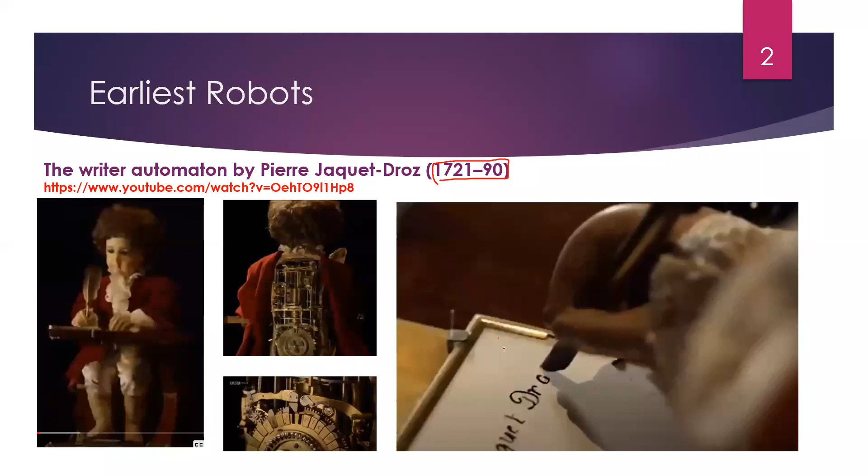This particular robot, for instance, was designed to mimic human handwriting, and it was made by a Swiss watchmaker. Swiss watchmakers are famous for making very precise and very complicated watches, and they have been famous for that for a long time.

This watchmaker made this robot, which was back then called an automaton, and it was used by some bankers for automatic signatures. So it was fully programmable. As you can see inside, the programmability comes from the gears, which were set in a certain way so that this robot could write or do certain signatures. You change the gears and an entirely different signature could be done by this.

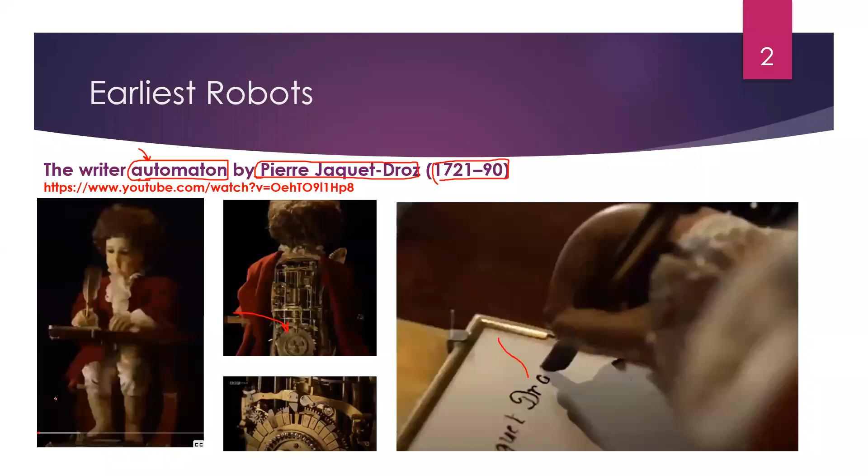So such an early system worked precisely. One other thing you could notice is that although the purpose of this robot is only to write something on paper, it was made in the form of a human. This is a full human length, human sized robot. Although they could have done the job by just building the hand, humans are also fascinated by the idea of having a full human sized robot or someone that could help them with their tasks.

This is the fascination. This is why, if you go to industry, there are many mechanical robots and they do the job very efficiently, so we probably don't always call them robots, we just call them machines. They do the work exceptionally well, but still we want our future machines to look like humans. So that is the fascination with robots. Whenever the name robot comes up, we think of a machine that looks like a human.

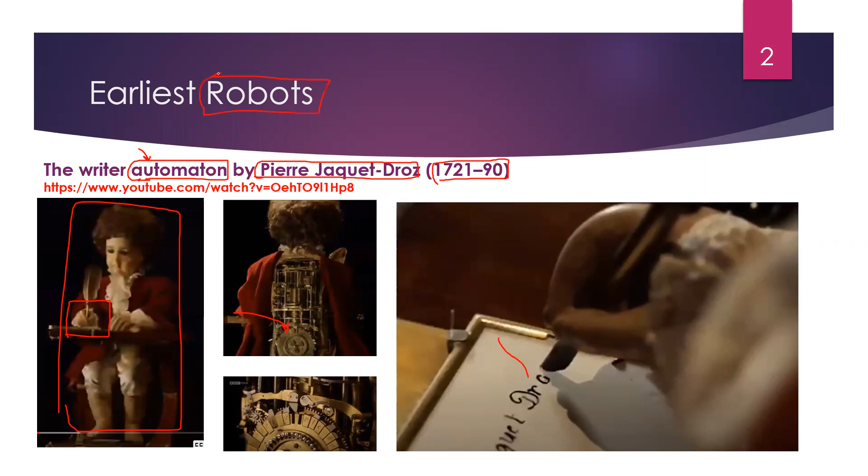And this fascination has been reflected a lot in science fiction. If you have been following the media portrayal of robots, you could notice a trend of robots mimicking humans as much as possible. For instance, back in 1977 in Star Wars, R2D2 was an intelligent robot, but it did not look like a human at all.

Gradually we see robots becoming more and more human. For instance, Terminator 2 in 1991, although it looked like a human, it was exceptionally powerful, very intelligent, and of course it looked like a human being. But we still thought that maybe something was missing, and that's why in Ex Machina, which came out in 2015...

...the robot was actually disguised as a human being. So, almost till the middle of the movie, the people watching could not guess which was actually the human and which one was the robot.

That's the fascination: making a robot almost real, so real that you could not distinguish whether it's a real person or a robot. That happens when you incorporate a lot of intelligence inside.

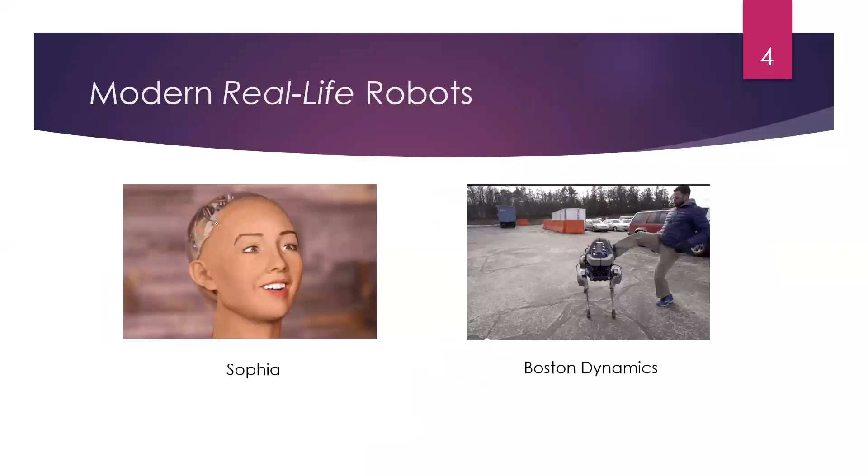Although Terminator is very powerful, and R2D2 could even fly spaceships, we did not settle with those. We want an actual human-like robot. That's why, if you have been following the news, you know the Sophia robot.

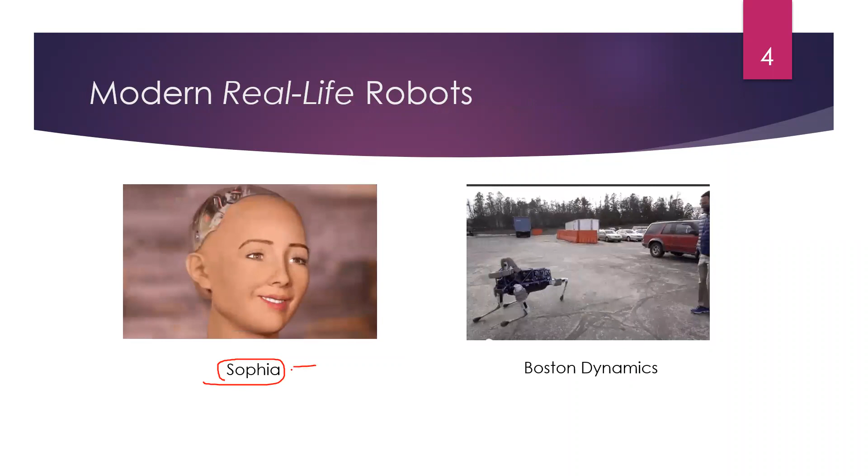The entire purpose of this robot is to hold conversations and express human-like emotions. But this is one dimension of robots. On the other hand, you may have followed the works of Boston Dynamics, which has now become world famous for their exceptionally agile and intelligent robots.

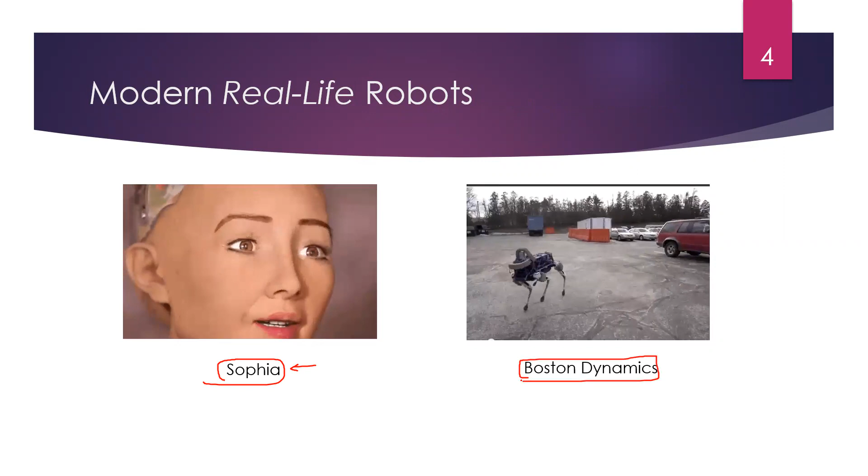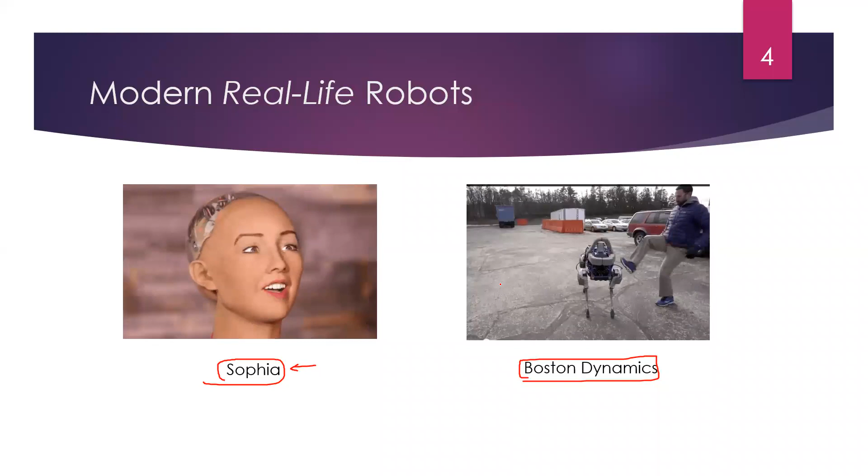These robots, although I would not call them exactly intelligent, they are very agile. They can work in various terrains, indoors, outdoors, in difficult terrains, and so on. But they are not that much intelligent, although a lot of different types of intelligence go into them. So that's the purpose of this talk today.

Not only in the media but in the actual world now, we see quite sophisticated and seemingly difficult to make robots. So what else remains for us as engineers? Can we still do something about it?

The answer is yes, because these robots are highly specialized, and you would not want either of them in your homes. In your homes, you would want something to help you with your kitchen tasks, for example. So none of these robots is suitable for that.

Our homes are messy, disorganized, and have different obstacles like carpets or stairs. These robots may not function well in our homes. So seemingly some dumb robots, if we want robots in the future to actually help us with our daily chores, for that we will probably need some very dumb robots as well. They may not look exactly like humans, but they may help us with a specific task.

That's the purpose of this talk: how to make robots that could help us with a given function. For that, we need to look into the skill set required for this.

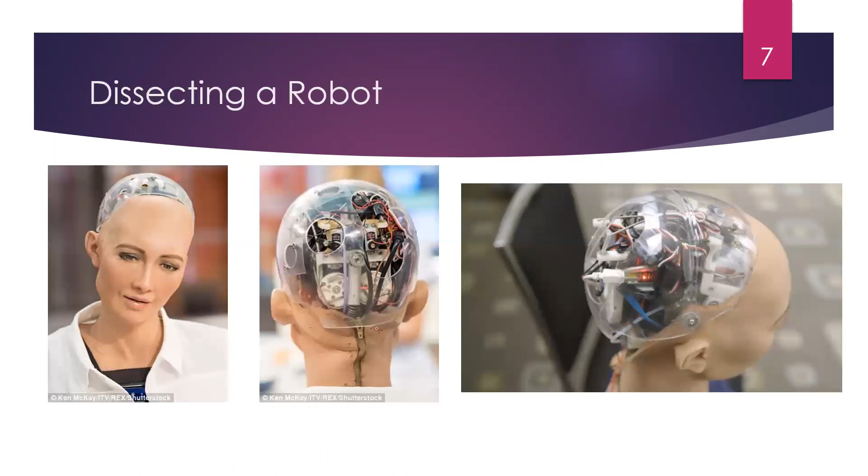So let's start dissecting the robot. As mentioned already, the most basic thing when discussing robots is, of course, the motion.

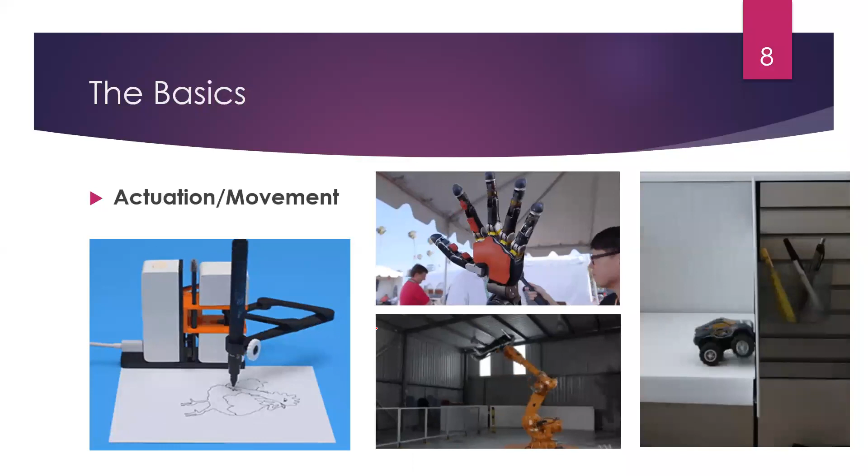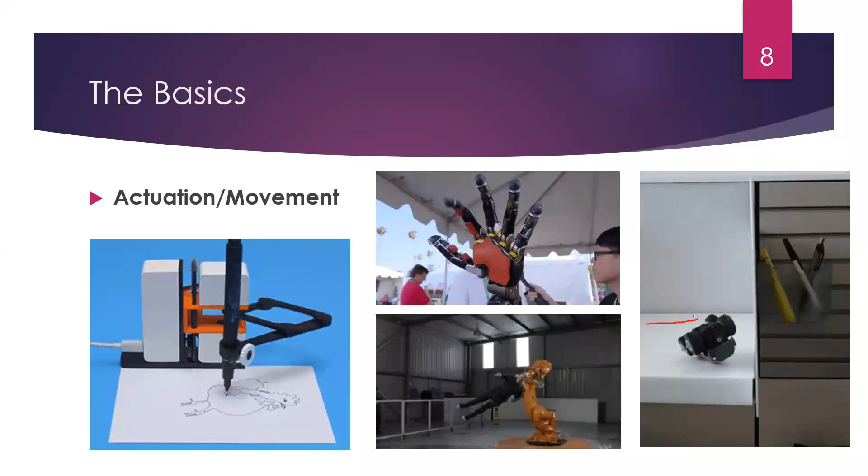When it comes to motion, there could be multiple types of motion. For example, a simple car going from A to B would only require simple rotational movement on its wheels. But if you are interested in making a robotic arm, then you would want multiple motors to act in synchronicity with each other.

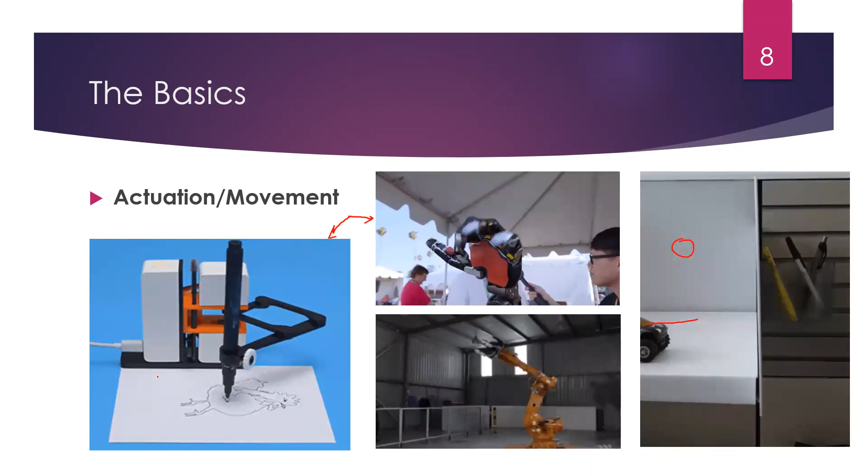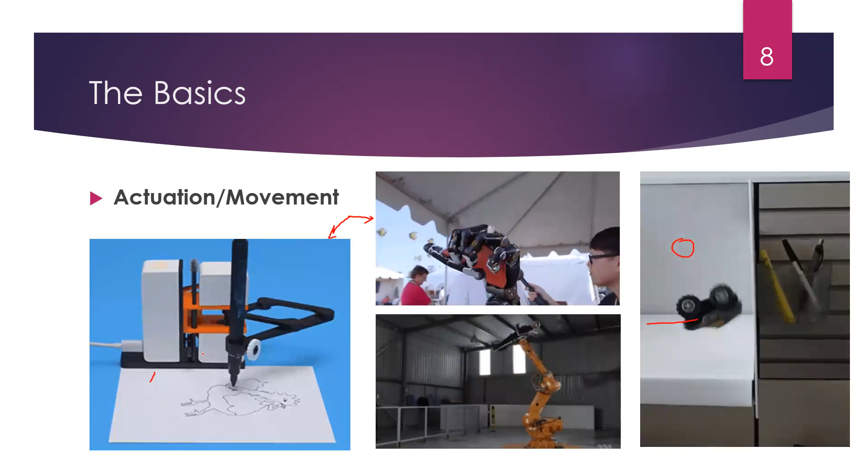So as to do a certain task. For example, in printers, you would want the inkjet or the laser jet to move to a very precise location. That is only possible if you have multiplicity of arrangement of motors, which are doing this very precisely. And the same is the case for maybe prosthetic robotic arms.

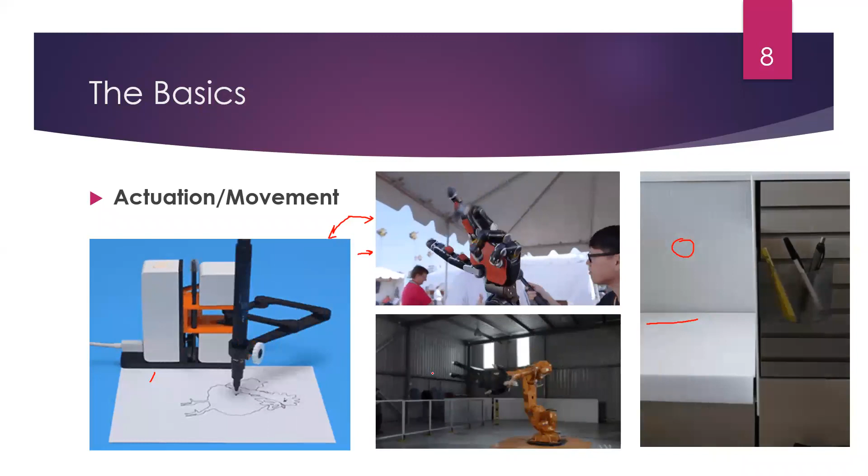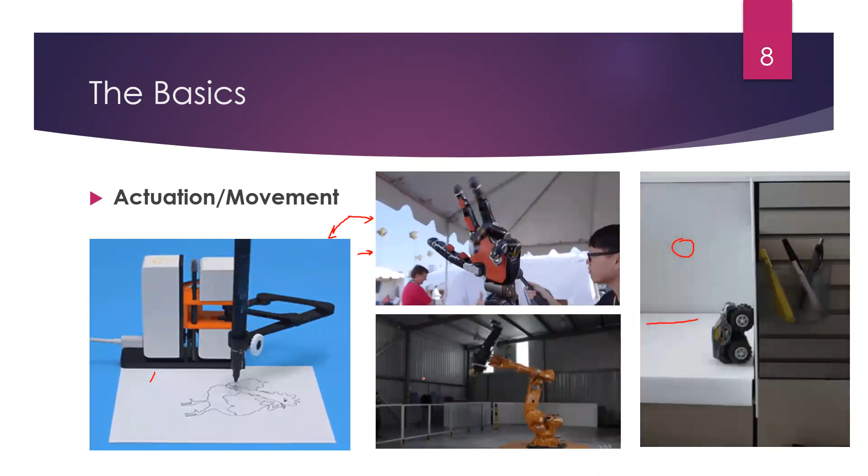And in the industry as well, your goal would be to carry heavier loads, but not just carry loads, but also do it with some precision. So you would want a particular heavy component to be moved along a certain path, going from A to B in a certain way.

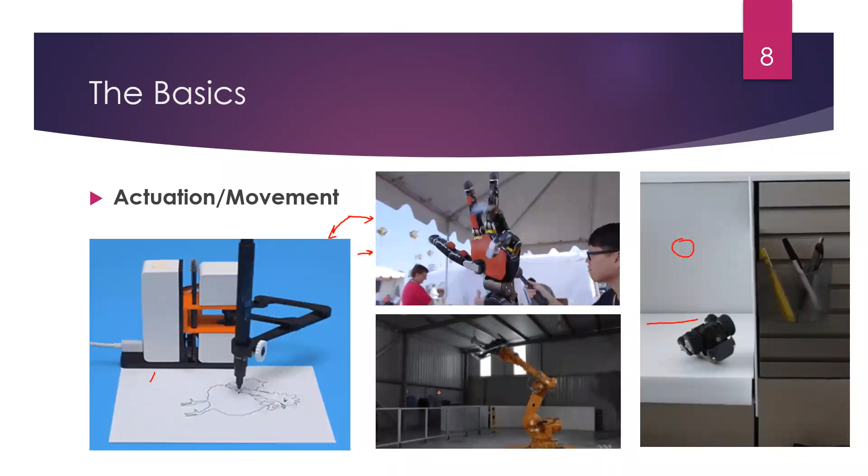So each of these motions require a different set of motors. Of course, the most basic of these is the DC motor. When you attach gears to them - as engineers, I'm guessing you already know that gears, when you attach them to a basic motor, give the motor additional torque.

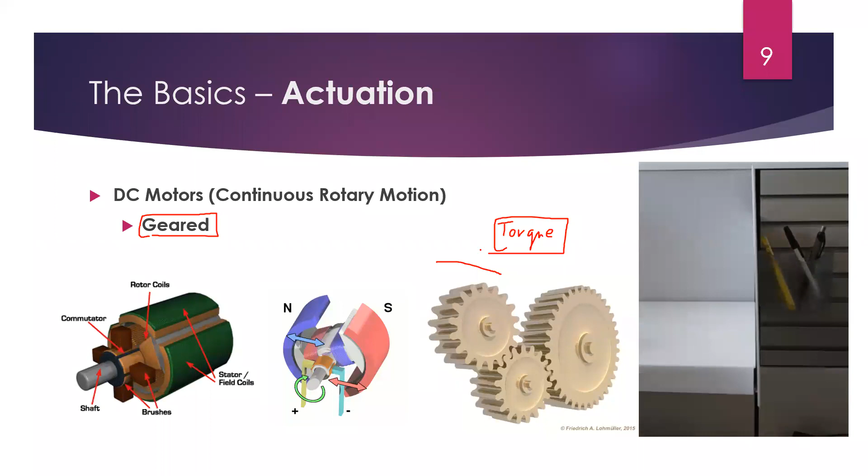So in most cases, torque is an important thing. The most basic amendment you could do to a simple motor is, of course, add some gears so that you have additional torque. And then you would also want to do some very basic controls - for example, changing the speed of the motor, and also changing the direction of the motor.

So all of these things have sort of matured right now. Maybe some 30 years ago, in the 80s or 90s, doing a project on robotics would have been a very expensive hobby, requiring you to collect things imported from some very specialized location. But these days, thanks to the advancement in power electronics, and also the way we now build motors, this has improved a lot in the last 20 or 30 years.

So now we have plenty of ready-made devices available that help you build your robots real quick. And speed control or direction control are now considered the very, very basic things.

So just for your reference, if someone is interested in building a simple speed and direction control circuit for a simple motor, this is a very commonly used power electronics circuit that electrical engineers very commonly use in their projects. So if someone is looking for building a very quick and dirty robotics project where you want to change the speed and direction, this is what you should be looking for.

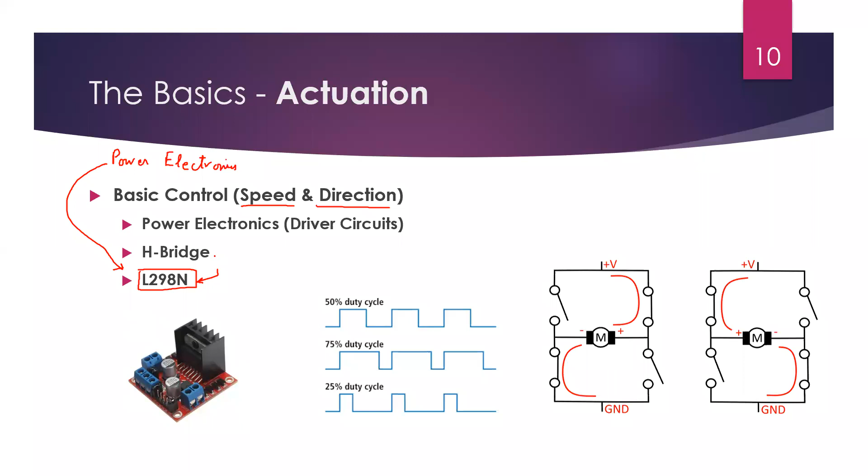Then once you have done the basic movement, you would want to do it precisely. Maybe you would want to move the motor by a certain degree or by a certain distance. So for that, we would require what we call the position encoder.

So inside the motors, after we have added the gears to add torque to it, we would now want to measure the position as well. So for that, we add what we call the position encoders.

Again, thanks to the advancement in industrial technology, motors with position encoders are very freely and cheaply available, and you could control not only their speed and direction, but also read at what distance exactly they have traveled, how much angle in either direction, clockwise or anti-clockwise, they have moved or you would want them to move.

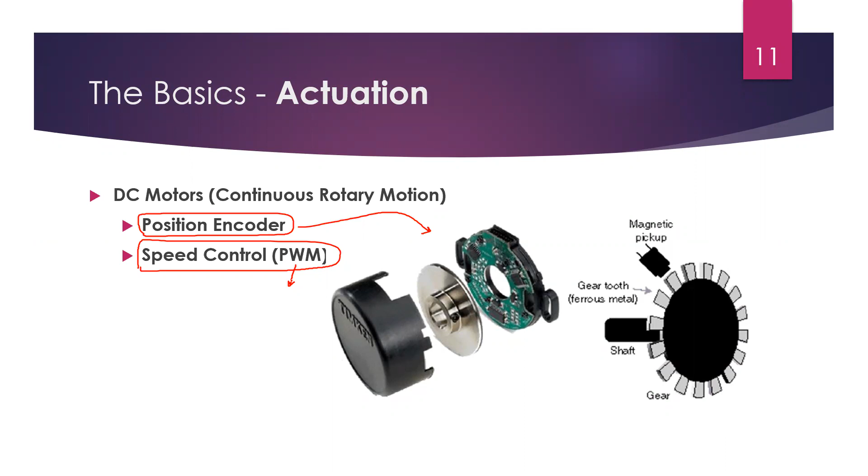And then you could control their speed through a very famous, very popular method, which is PWM, pulse width modulation. I truly wish we could go into further details, but since the topic right now is robotics in general and not motor control or power electronics, I will not go into further details, but of course you are welcome to search more into this area.

Now, thankfully, using the same methodology, which is pulse width modulation, we could also control a second type of motor - the type of motor which goes back and forth. For example, if you notice the behavior of this motor, it can move by a certain angle.

It doesn't continuously rotate in either direction, clockwise or anti-clockwise, but it moves by a certain angle, and the angle is controlled through a similar kind of signal, which is pulse width modulation. So we call these motors servo motors.

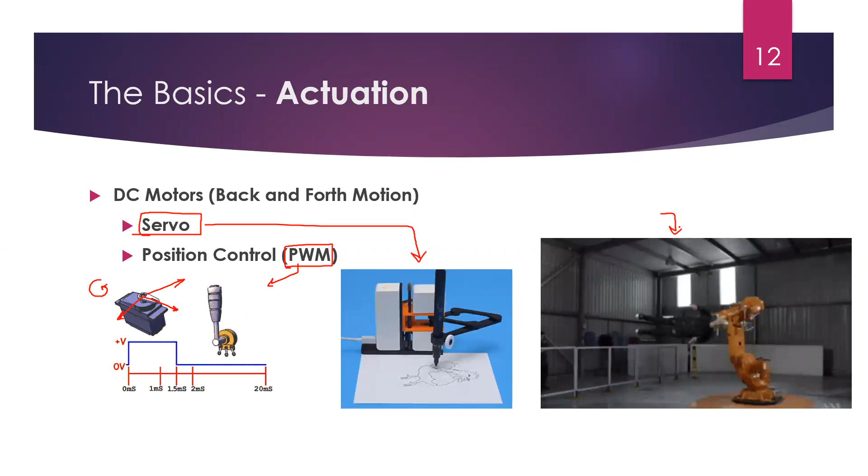This is the kind of motor you would hook up inside a printer, for example, for precise movements, and also in industrial robotic arms. If you want to build a robotic arm which can have certain types of movement, but not exactly rotary movements, then this is the type of motor you should be looking at. Your actual arm, your knees and elbows, they all move something like this. We cannot rotate our knees or elbows, but we could do something like this. So using this you could mimic a robotic arm very easily.

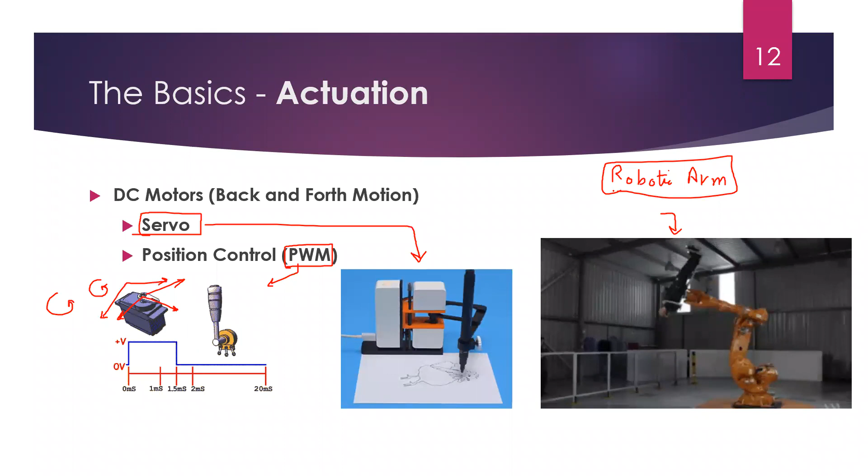And they can be quite strong. They can have a lot of torque as well. You could very easily get from the market some very small servo motors, as well as very large ones which could carry a lot of weight.

Finally, the last type of motor is where you want extremely precise motion, for example in a printer. Although the servo motor we just discussed could also move precisely, its main purpose is carrying heavy weight, not precision. So that is precise, but not this much precise. These types of motors, which are inside 3D printers as well as normal printers, are very, very precise. They can move in the order of millimeters.

They could move by one millimeter in either direction very easily. But of course the downside is that they cannot carry a lot of weight. They cannot provide you a lot of torque. And their control is also a bit more complicated.

But as I mentioned previously, the control and power electronics for these motors have now matured to the point where you could just buy most of the control very cheaply, and they are very commonly available. Even some 20 years ago, getting your hands on a stepper motor would have been difficult. Getting spare parts for your printers would not have been an easy task. But nowadays these things are considered petty electronics.

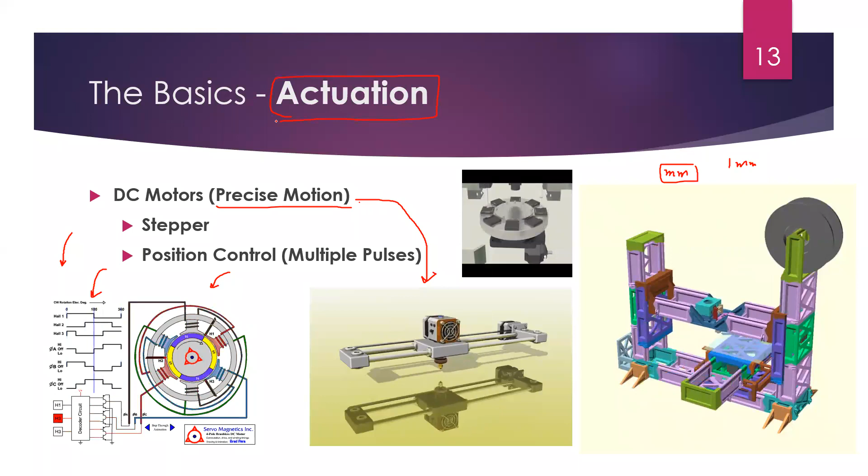So these are the three basic types of motion we have just discussed. PWM servos for precise motion, but with also some torque. Stepper motors for very, very precise motions, but not a lot of torque. And gear motors where you can have a lot of torque as well as a lot of speed, and they can also be moved precisely, but not as precisely as steppers. So depending on your application, you would want to choose an appropriate motor.

Next comes the topic of sensors, because once you are moving your robots, you would now want to also do something more intelligent. So when we talk about intelligence, automatically sensors come in.

The most basic of the sensors that you probably might have already used, or may have read about, is the distance sensor. These are very commonly available - the sonars or ultrasonic sensors. They work on the basis of echolocation, and they work very nicely for most indoor environments. They can help you judge the distance from various obstacles, but of course they have limitations.

They do not work well for obstacles that are at an angle, and for certain soft materials like clothes, they do not work really well, but otherwise they are pretty good at judging the distance between different obstacles. Imagine putting this on the front of the robot, and you get a fairly good idea of where the obstacles are. By the way, these are the same sensors found on the bumpers of most cars.

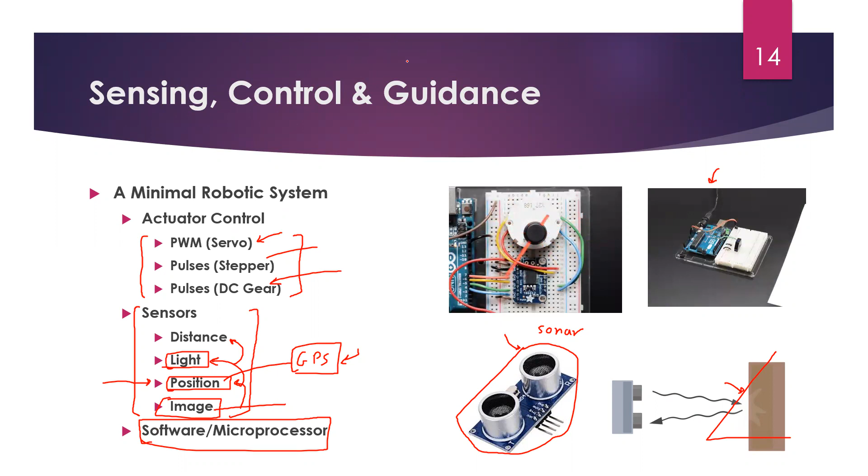So we have seen that motion is probably a done deal. You could control a motor precisely, tell it to go to some place by some angle and some distance, or attain a certain speed, but that is the actuator only. If you now want a meaningful application, you would want sophisticated control. So what's control? Control is on top of your basic actuation.

Imagine a car, or a robot, that has to follow a line. I'm guessing that as engineers, you must have seen a line following robot at least once in your life. So what is this line following robot doing? Inside this robot car, there are of course two motors at least, and those two electric motors are being driven, but what is making it follow the line? That is the most basic control.

At the very basic level, it would be an on-off control that works like this: you have sensors which detect the line. If you are going towards the left of the line, you turn right. If you're going towards the right, you turn left. So it's on-off, or right-left control. That is the most basic control.

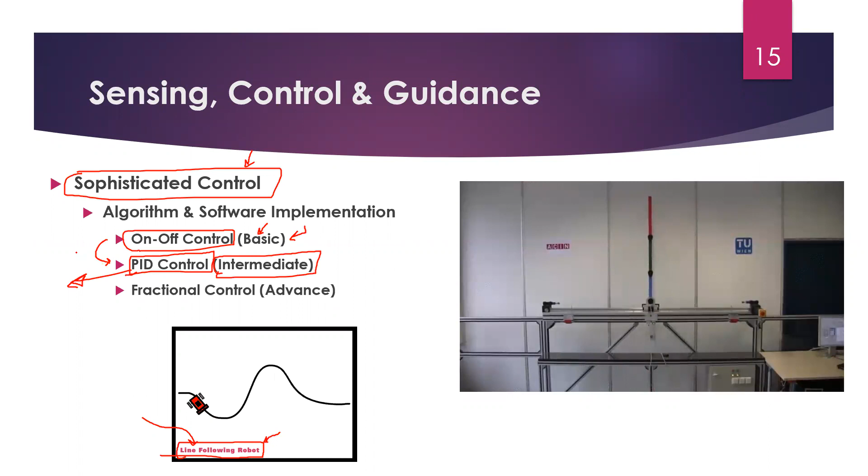PID control is a huge improvement over on-off control, and that gives any motor control the precise or smooth control. We call this an intermediate level control, not the basic, but somewhat intermediate, and also not too advanced. But in most robotics projects, you will find that PID control is sufficient to give you a very smooth kind of control.

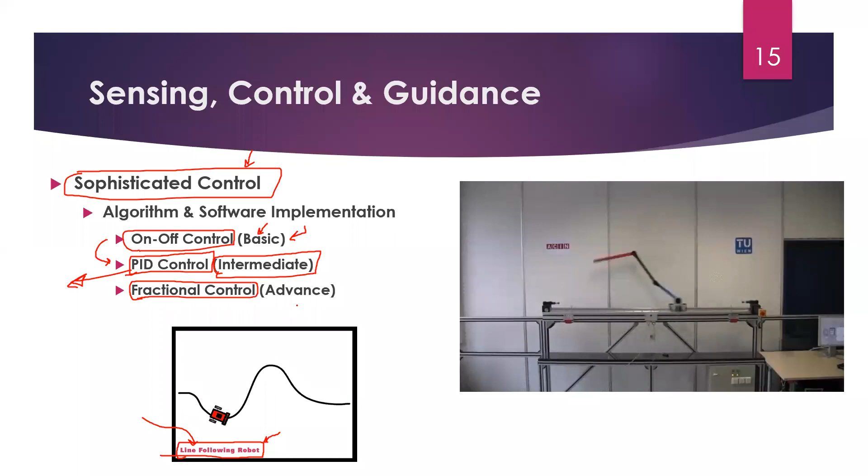And then we will have more advanced control. One example of a very advanced control is fractional control. Those fractional controls are used in very sophisticated operations. So if you are looking at a robotics project, then maybe this PID control is sufficient.

So over here on the right, you are seeing an application, a toy application you could say. This is called an inverted pendulum. Here you can see that the goal is to hold these three sticks upside down. The actuator can only move sideways - there is no other actuation. But there are sensors that have been mounted here.

What type of sensors? They are called tilt sensors. They measure how much the bars are tilted - the kind of sensors that you have in your smartphone. Your smartphone knows if you are holding it horizontally or vertically, and then it accordingly shifts your screen, rotates your screen. These are called tilt sensors.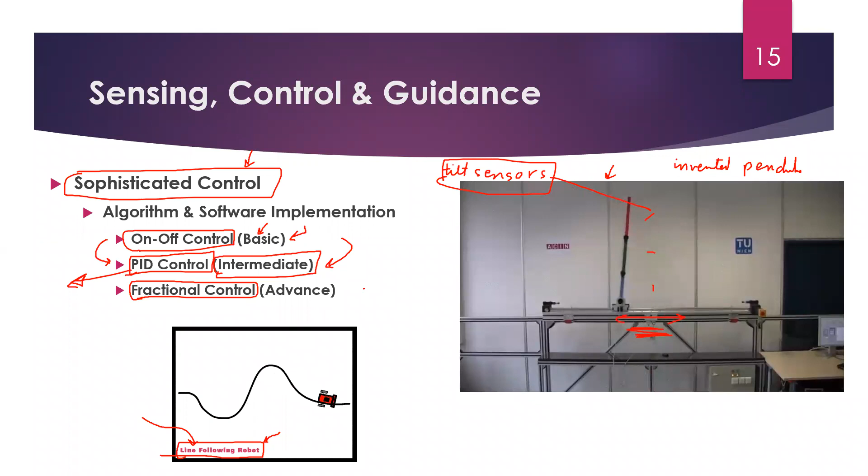So the same type of sensors are probably installed in these three bars, and based on those, this motor, or the actuator, is just doing this translatory motion and balances that. And that is probably a much more advanced control. But you could do a similar thing using PID control as well.

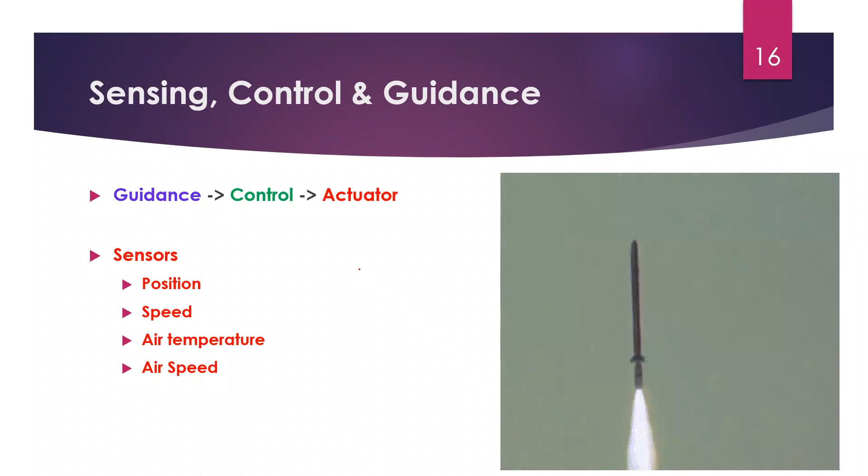So we have seen that the most basic of things is the actuator, the motor. You are giving it some control signals so that it moves forward, backward, some speed control, and so on. And on top of that, you need to have a control. The purpose of this control is, for example, to have...

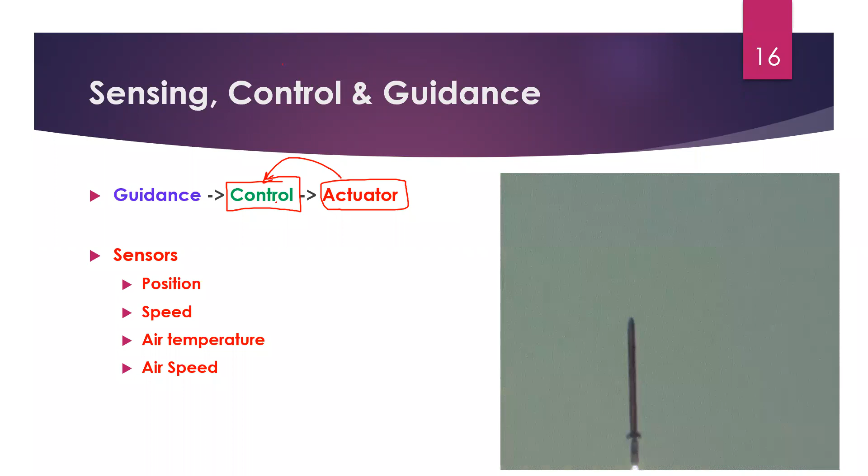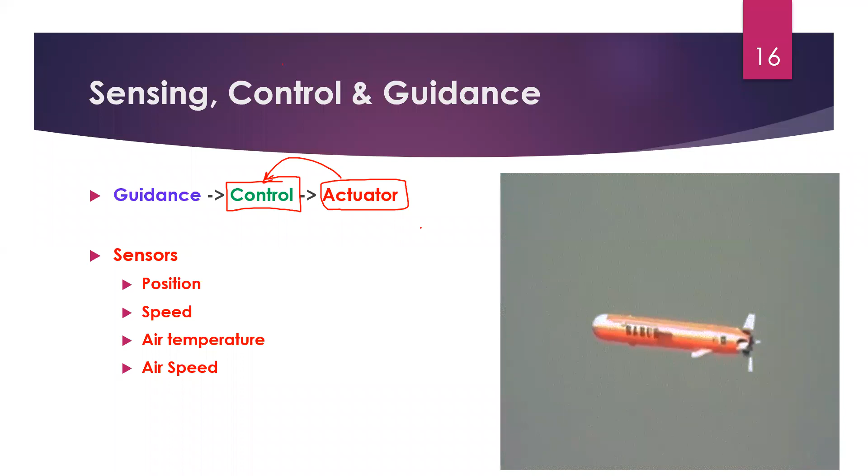Okay, so on top of the basic actuation, we have control. And the purpose of this control, like we saw previously, could be as simple as follow something, follow a line, follow a path, maintain speed, or in the case of airborne vehicles, maintain some angle of flight, and so on. This is what we call the basic control.

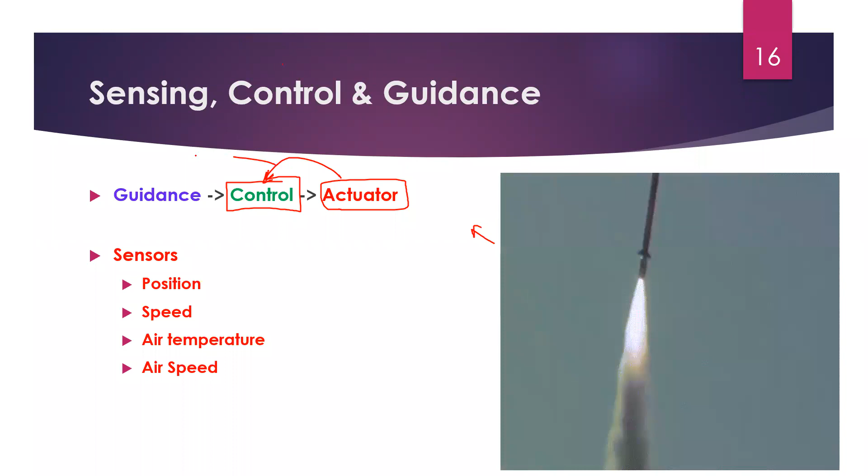And then on top of this, we have the guidance. So guidance is going from A to B. This is the purpose of higher order robots, for example, a missile. There we could make use of certain more advanced sensors as well.

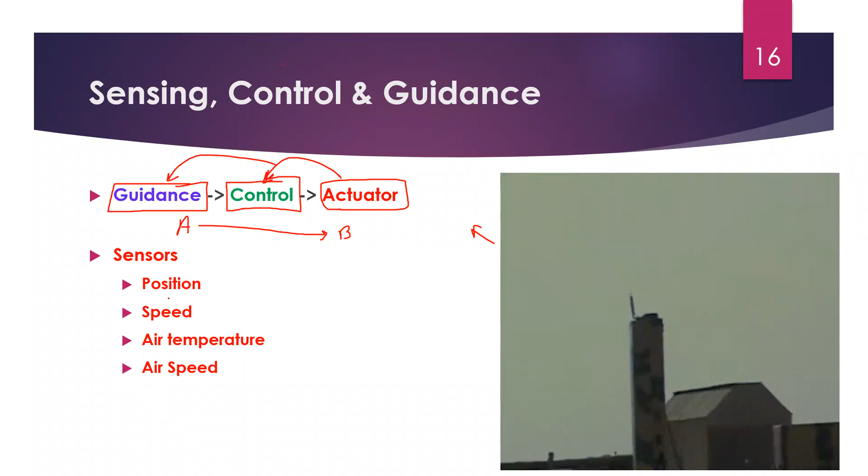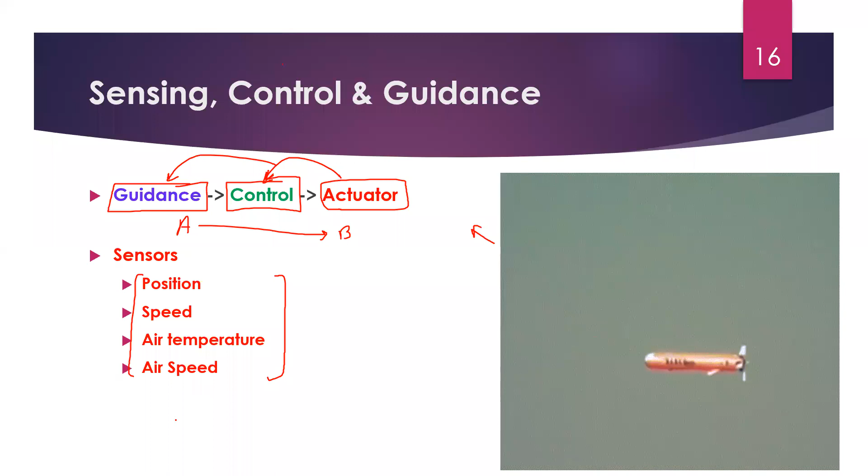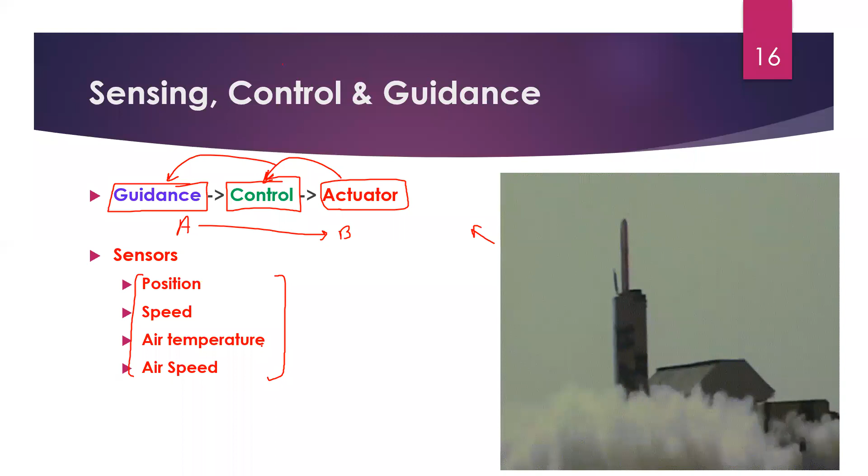Simple position and speed sensors may not do really well, so we would want some more advanced sensors there, plus some other sensors like air temperature or air speed. They might come up because maybe the missile has to move up or down based on air temperature and speed, so as to maintain some flight characteristics. That is the purpose of guidance now - that is a higher level control.

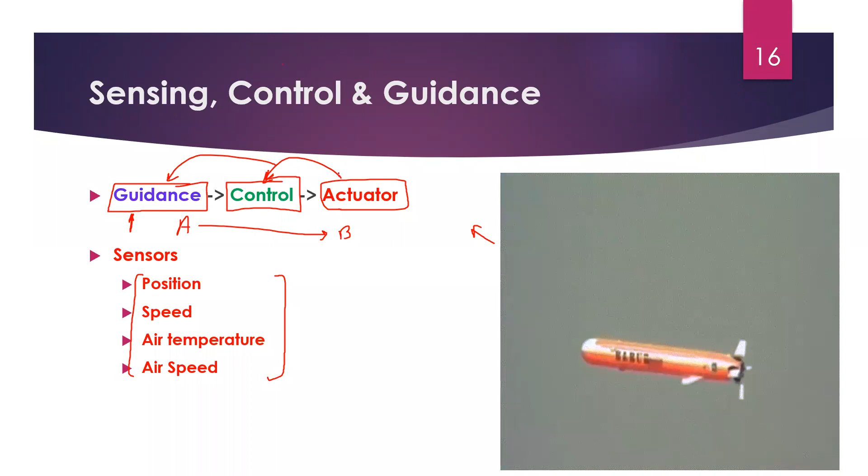And now you can see that very quickly we are moving upwards, and the robot or system is becoming more and more sophisticated. And once we add some autonomy to it, that means doing something - we just give it a goal and then it does it automatically without human interference. So that's what we call artificial intelligence.

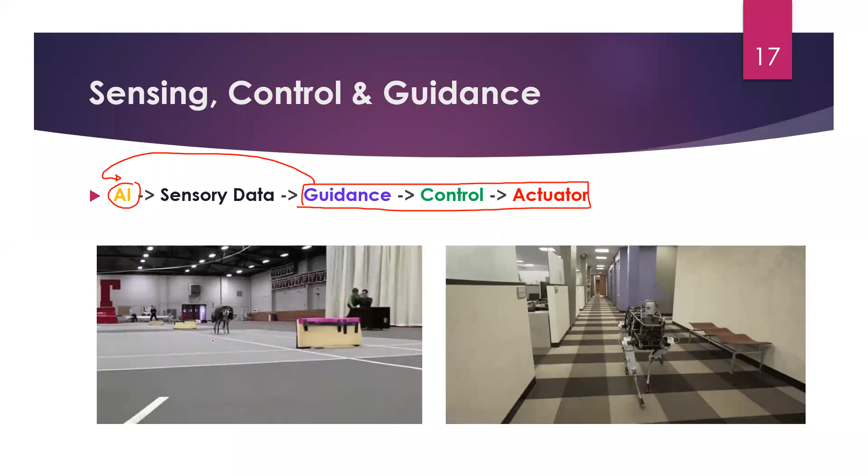You can see in this example here, this is the same robot dog from Boston Dynamics. Maybe the goal is to start from point A and come to point B, and whatever happens in between, you are responsible. So what is happening? These legs that this robot is using, you could guess that they can only do an angular motion - they are not fully rotating. So they are some type of servo motors.

Each of those servo motor legs are actuators, and they get signals from the control. The control simply does this back and forth motion in a certain fashion. That control is getting commands from the guidance that says, okay, we have to go from A to B. And that guidance is further being dictated by AI.

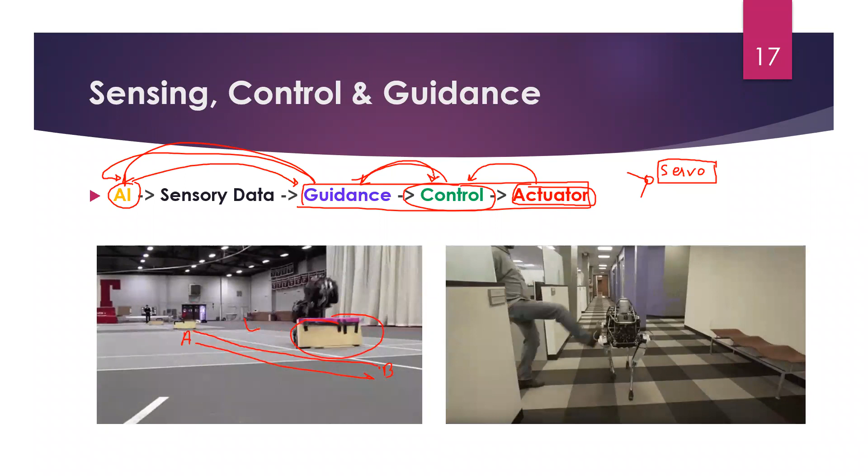There are also sensors looking for obstacles. For example, when it goes somewhere and senses an obstacle, it gives further guidance to the control unit that now you have to jump as well. So the guidance will slightly change the characteristics, telling the control that now your job is not just simple motion, but also jumping. Then the control accordingly translates this command to the actual motors, and this is how it happens.

When the guidance is driven by AI, that's the ultimate goal: we give robots a very high level command to go from A to B and do it at any cost. Even if there are obstacles or anything, they have to just do it.

You could see another example here, where this robot is being perturbed by an external force. Neither the actuator, nor the control, nor the guidance can actually sense that in advance. They cannot foresee it. So some intelligence is built into this control, such that if there is a perturbation that tries to topple the robot over, there are sensors available.

The most common of them is the tilt sensor. So the control, without telling the guidance or AI that it has experienced a kick, will just try to balance itself, with feedback happening within this simple control and actuator loop. That perturbation is probably being handled through this sensory motion.

But this kind of obstacle is a different one. That is probably being sensed by the AI using cameras, and the AI tells it to change course. So different types of perturbations could be handled in different ways at different levels of control.

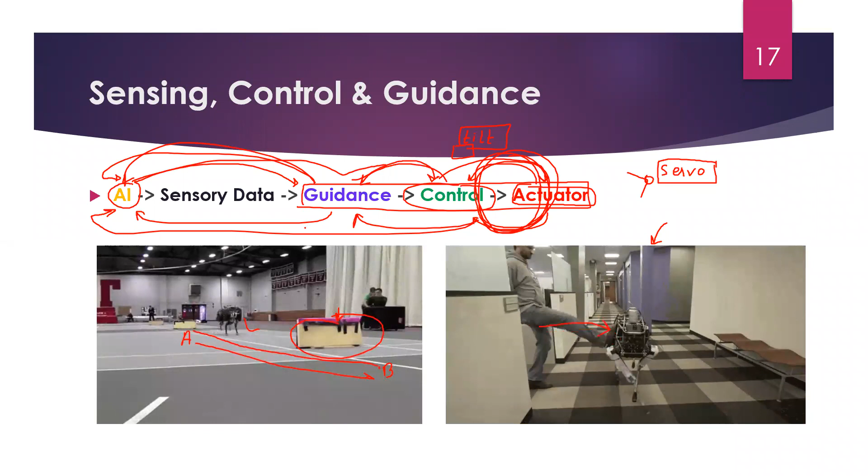This is what I meant when I started this presentation. I said that these days robotics is all about AI, machine learning, and computer vision. Why? Because these three things have sort of matured now. Over the past 20, 30 years, we have had enough research on making good motors, electronics, control, and guidance algorithms, and they are all there. I'm not saying research has stopped there; they are still making things better and better. But these things have sort of matured.

But AI is still a work in progress, and you can imagine why, because this is still not a solved problem. If you see this sensor at the top, which is rotating, this is a LiDAR. This is a very expensive piece of equipment. What does it show you? Let's take a quick peek here.

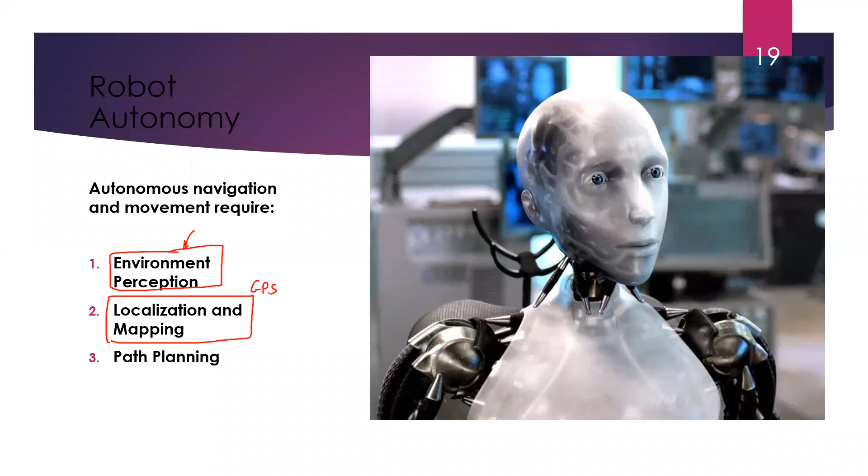So again, as we mentioned, outdoors maybe GPS is sufficient, but indoors there is no such thing as an indoor GPS. So indoors is still a problem.

So images have taken up a lot of these tasks, and they have actually solved a lot of problems related to this. That's why in most of these environmental perception problems, most of them can be done through image processing.

So what does image processing do? The most basic of these tasks is object detection. So what is object detection? You just see in the images where different objects are, and we try to locate them.

Are there too many vehicles, and where exactly are the vehicles, and so on. So we are not getting the exact distance information like LiDAR does, but it does actually maybe a more important job by identifying the objects that are in the picture.

And with stereo images, with stereo videos, meaning two cameras side by side, we could also detect the distance as well. So another very commonly done and important thing is image segmentation, where we not just identify the objects, but also do a pixel by pixel job.

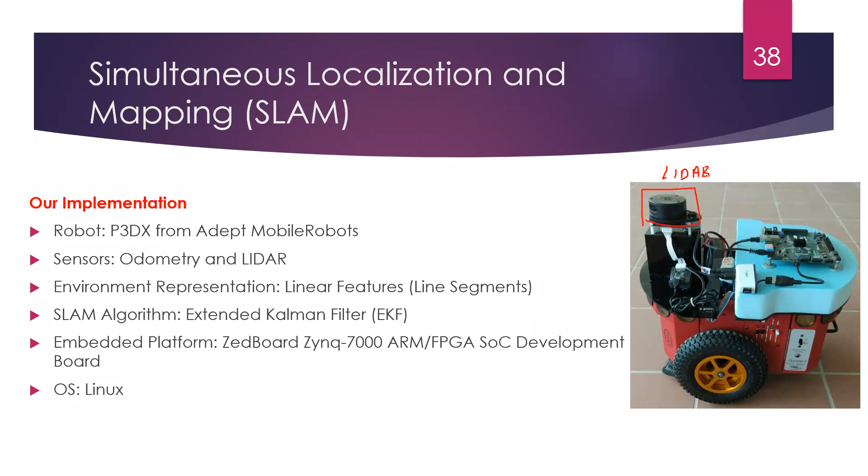So what we did at KU, just to give you some idea of what we can do with whatever limited resources we have: this is one project using a very cheap 2D lidar, not the kind of lidar you just saw the demo for. It doesn't do a very good job, but it can do pretty well inside neat and clean corridors. You see this robot moving around in a corridor inside one of our buildings, and after running back and forth for some time, it has made a map of the building.

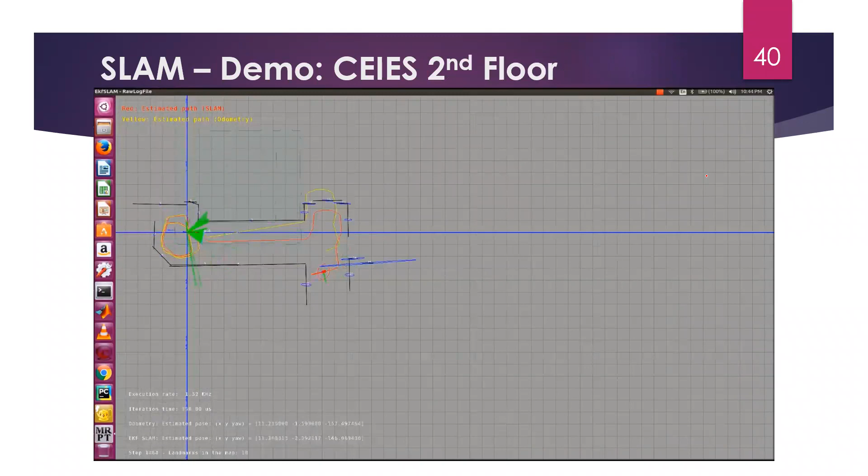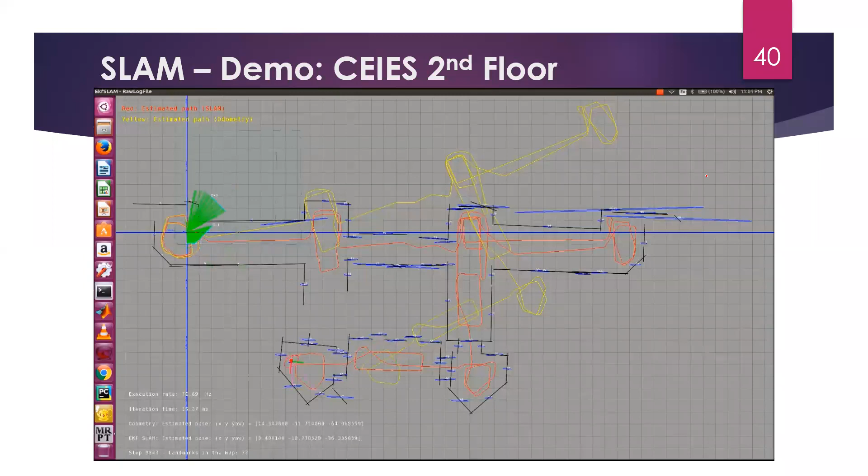This is a slightly more complicated corridor. Initially the robot did not know the map of it, but just by going back and forth, it is sensing the environment through the lidar and building the map. By the end of this exercise, it would have made the measurements and made the map. You could use such a robot in disaster scenarios, for example if a building collapses or something like that, you could send the robot inside and it will go in and do a survey, telling you later what kind of structure is left intact inside.

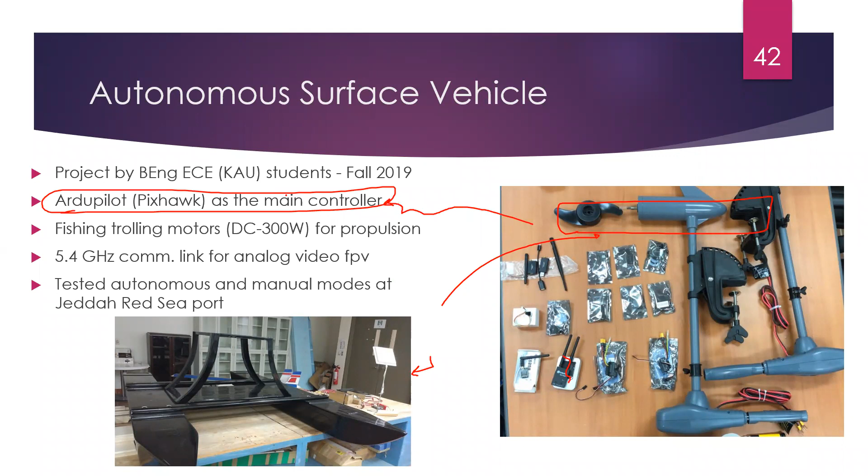Second case study: this was a joint project between the electrical and computer engineering department and the nautical engineering department. What we did was build a surface vehicle. This was done in a workshop in Jeddah, a simple boat or surface vehicle, and then we hooked this up with fishing motors. These motors are normally used for fishing, and we hooked this up with an autopilot, which is normally used for quadcopters and flying drones and so on. So we just integrated a few things, then added some electronics for communication and so on, and alhamdulillah, we were able to do a very fine job.

We tested it at the Faculty of Marine College facility, and we tried the autonomous mode here, setting both autonomous and manual control. We set the waypoints going from point A to point B on the software, and the boat demonstrated that it went from point A to point B, then to point C, and then back. Alhamdulillah, great success.

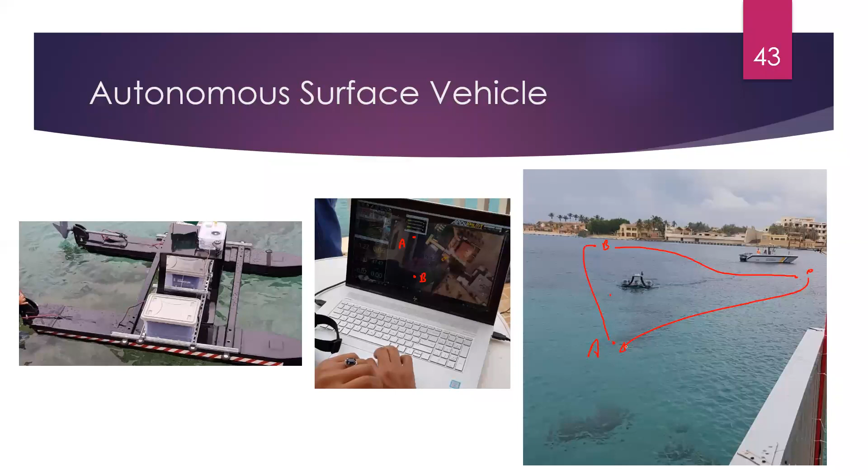This was the only chance we had to take the boat to the sea, and it was the first time. It worked, alhamdulillah, on the very first attempt.

The last case study is this one where, with students again from ECE, they converted a small child's car into an autonomous mini car. They made use of ROS, which we were just talking about, and implemented this on a Raspberry Pi. Here you can see it was able to detect traffic signs and change its speed accordingly.

It could also check for stop signs, for example, so when it reaches a stop sign, it will stop there. So again, a mix of artificial intelligence, some ROS capabilities, robotics, and motor control. This autonomous mini car was accomplished.

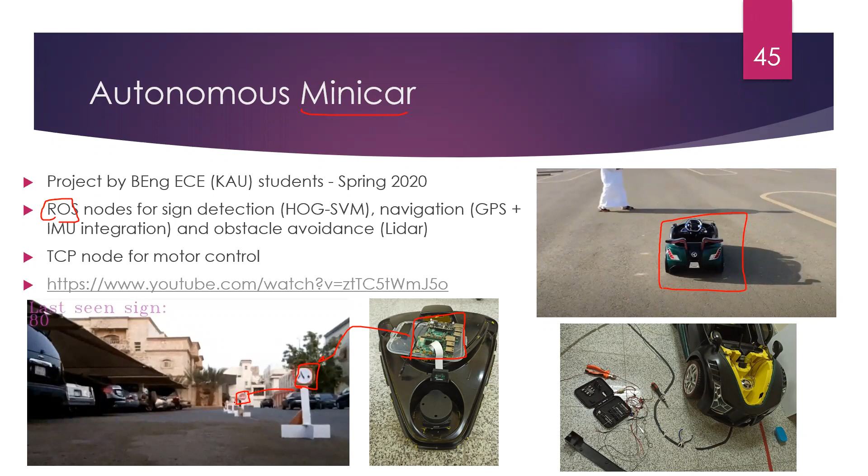Finally, just two years ago, we did this AI NEOM challenge where, alhamdulillah, our KAU team came in third. The idea was, again, to make a robot which will visit places instead of you.

So you will be sitting at home using VR goggles, and the robot will send you live video there. If you turn your head right and left or up and down, the robot will mimic your motion, and you will feel like you are actually visiting that place.

This was powered by a Jetson Nano, and it made use of a stereo camera, so it can detect distances as well as give you a very immersive perception. This was doing a lot of visual perception, which is based on AI.

Starting this semester, inshallah, we are developing some further robots for indoors. The purpose of these robots is to help with indoor tasks, carry a lot of weight, and do things we normally cannot do. You may notice we are using the so-called hoverboards, although strictly speaking they don't hover, but we call them hoverboards.

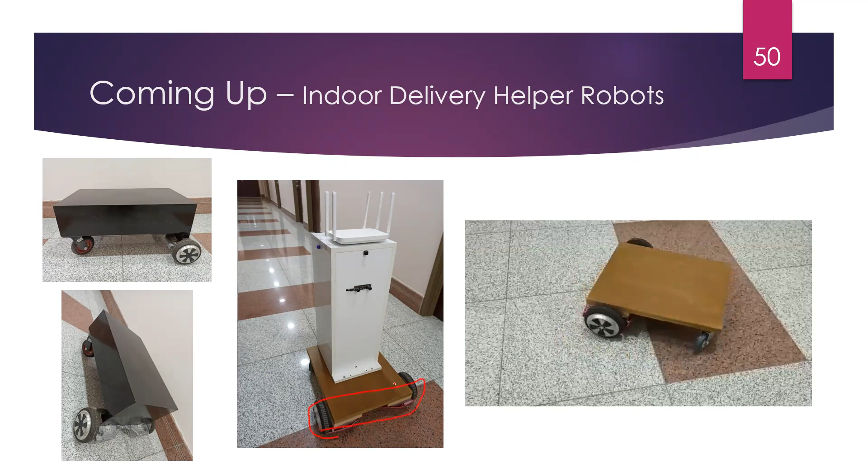They are an exceptionally good piece of engineering. They can carry a lot of weight, and they can go up to 20 kilometers an hour sometimes. That is good enough for an indoor environment, and we can put a lot of weight on them.

We intend to use a stereo camera in front. Of course, we cannot get the 50K lidar, so we are trying to use stereo cameras, and we could do all the processing there. Ultimately, we hope to build a working robot, inshallah.

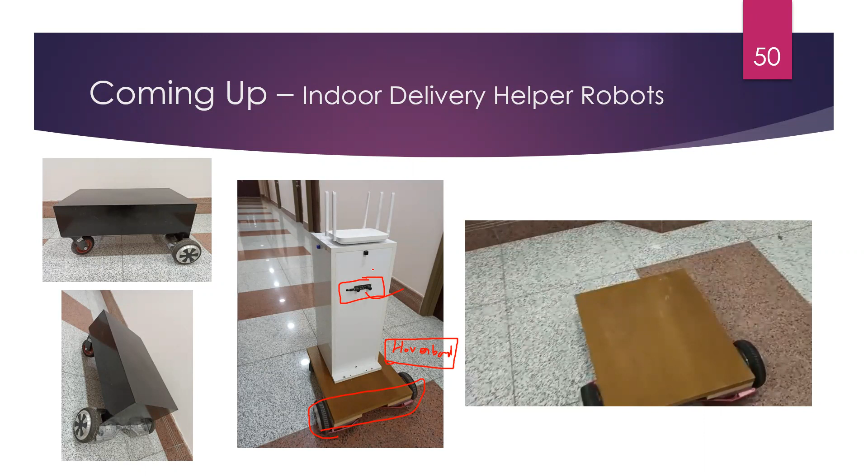If you want to work on this, a lot of hardware platforms have recently become available. Some 30 years ago, you did not have the luxury of having all of them here. Even getting a small microcontroller was pretty hard. You did not get anything soldered neatly like this, you got loose parts and had to solder everything up yourself. Building this was probably a project.

These days, fortunately, our embedded systems, for example a Raspberry Pi or Jetson Nano, pack a lot of power, and they're not too expensive. You can get them very cheaply, and they can do a lot of things for you. You can put AI into it, you could control low-level motors in it, you could implement ROS on it. So a whole robotic system could be implemented theoretically and practically on such systems, using ROS.

So what you should be prepared for, of course, is a lot of algorithms, design, mathematics, programming, and a lot of your sweat. Engineering, as I keep mentioning in every lecture I give, if you're not tired, you're not doing it right. So that's the end of it.